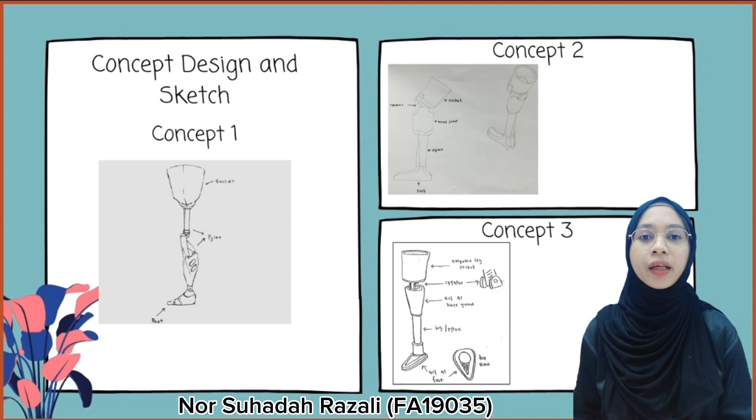We have 3 concept designs for our prosthetic leg. Concept 1 has 3 parts, concept 2 has 4 parts, and concept 3 has 3 parts. For concept selection, concept 3 was selected for our project because this design is user-friendly and comfortable.

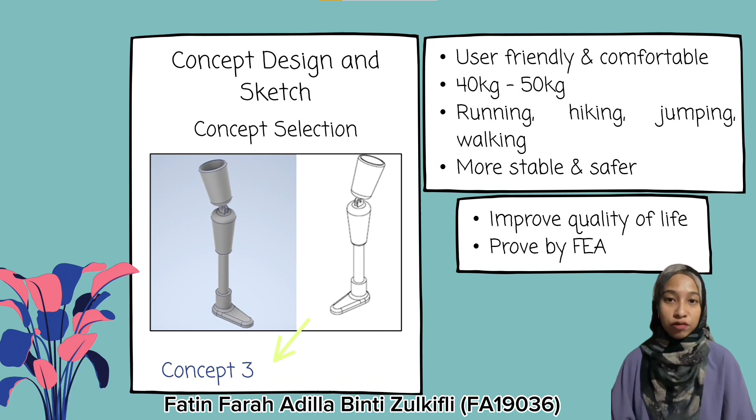It is suitable for weight between 40 to 50 kg and can be used for running, hiking, jumping, and walking. It is also more stable and safer, and may improve quality of life. All these statements can be proved by doing FEA, which will be presented in the next slide.

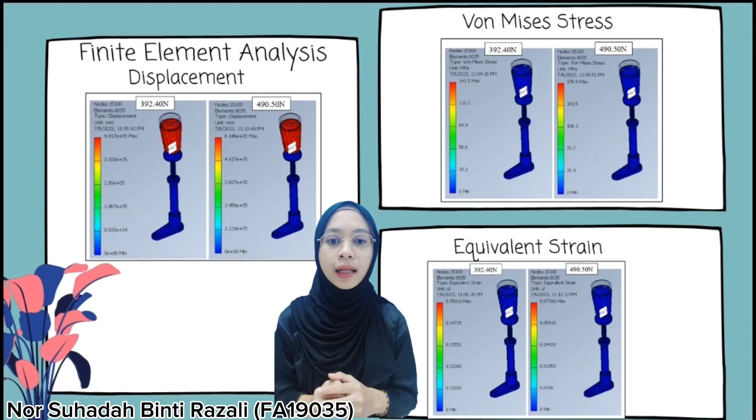This is the finite element analysis. We did FEA before printing this part. The FEA was done after doing a topology optimization to get the final design. There are 3 analyses: displacement, von Mises stress, and equivalent strain. The results show that this prototype will support a weight of 40 kg to 50 kg.

For prototype design consideration, we considered 4 items: the first is the scale, the second is the thickness of each layer, the third is the orientation of the product, and the last is material selection.

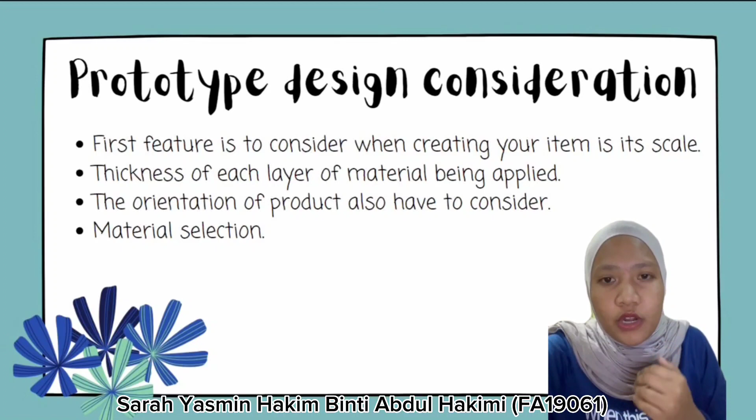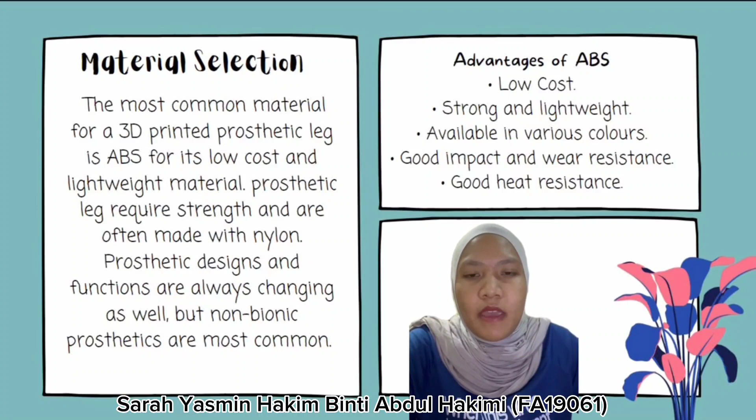For material selection, we chose ABS because it is commonly used for 3D printing prosthetic legs. It also has several advantages: first, ABS is low cost; second, strong and lightweight; third, available in various colors; it also has good impact and wear resistance; and the last advantage is good heat resistance.

The bill of materials for our product has 5 parts: part A, part B, part C, part D, and the pin for the prosthetic leg. Every part has a quantity of 1 only, and all materials used are ABS.

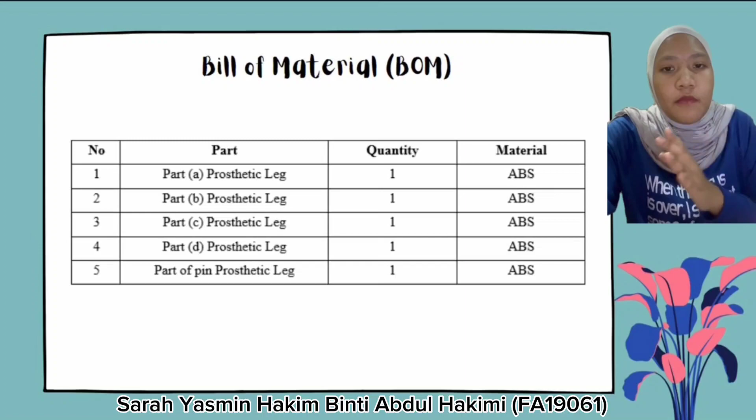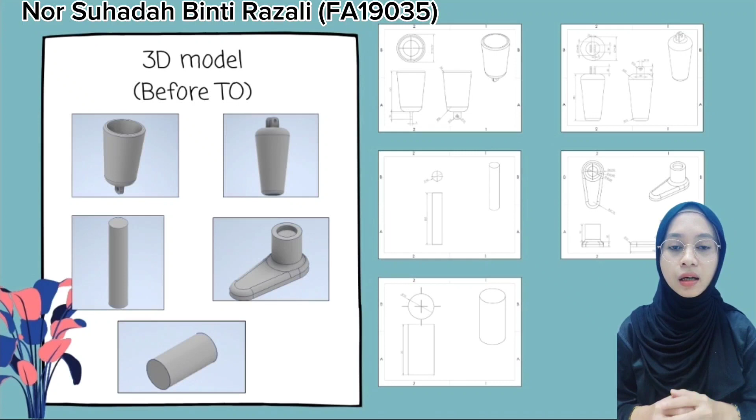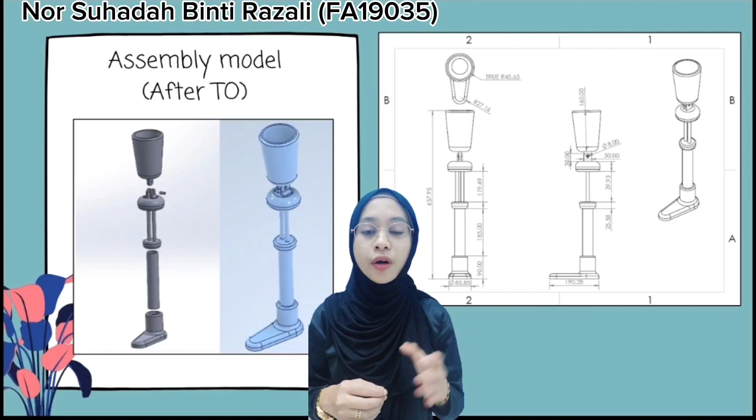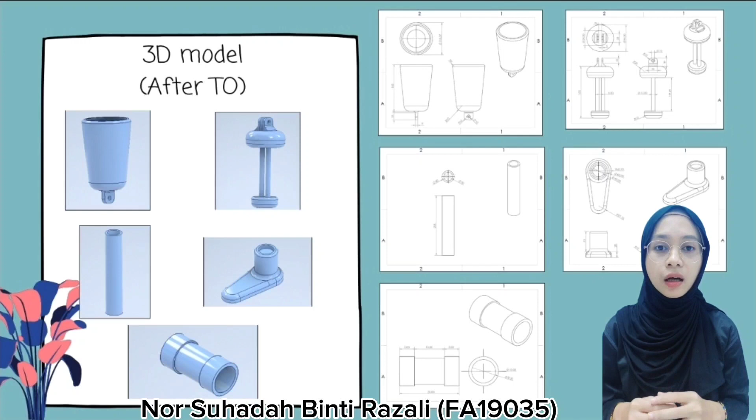This is the assembly model after topology optimization, with our design and dimensions for the product. This is the 3D model after we did topology optimization, with the design and dimensions shown.

For the functional criteria, which is the main parameter of our product, we focused on the strength of the prosthetic leg because the product needs to be long-lasting and have better quality. Based on the FEA results, our product has good strength and can withstand the considered load.

The second parameter is energy efficiency of our product, which we are aiming to minimize the energy use as appropriate. Joint alignment will reduce fatigue and discomfort.

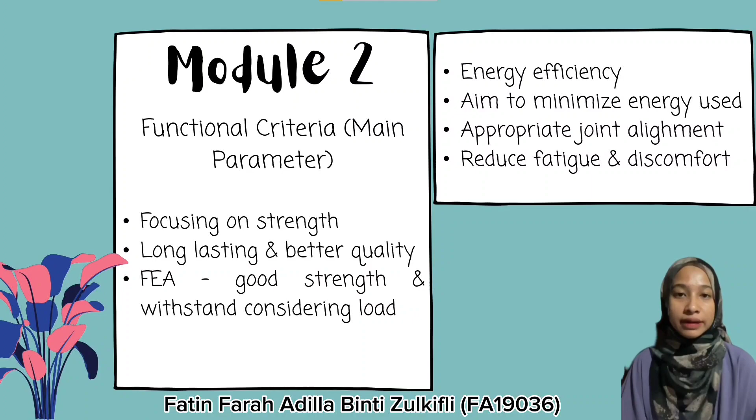For module 2, I have been given the task to do orientation and also support structure. This is the orientation of the 3D model that we designed using CATIA, and after that we convert it into STL format and transfer it into Ultimaker Cura.

So we want to see how the legs are made before we do the printing process. These are the isometric view, front view, left and right view, and also the top view.

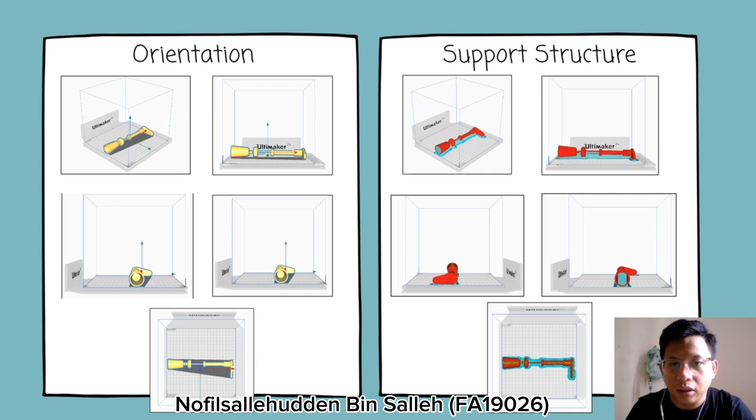For the support structure, after we do a slicing process, we can discover that the support system of the prosthetic leg we want to print has been generated. The turquoise here presents the support that will be printed for the process. The support helps in printing the structure so that it cannot topple easily.

Topology optimization process. For the topology, we did one design because this design has a lot of material. So the original mass part is 0.949 kg.

We do a mass reduction of 40%. Then the final mass is 0.569 kg. For this topology, it suggests doing a cross-section design, but we observe this cross design is not strong. So we adjust this topology.

This is the new design, using topology optimization.

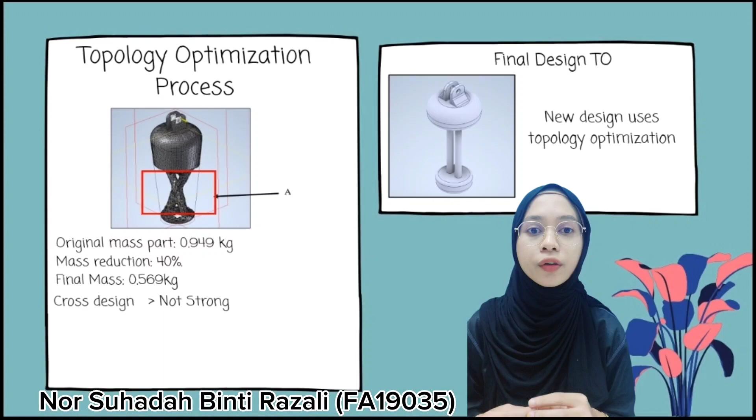For the printing parameter setup, we have 3 parameters. The main parameter, which is the first one, is speed. We use 50 mm per second for high quality print.

The second one is infill. We use 80% infill density because it can make our prototype stronger and more durable.

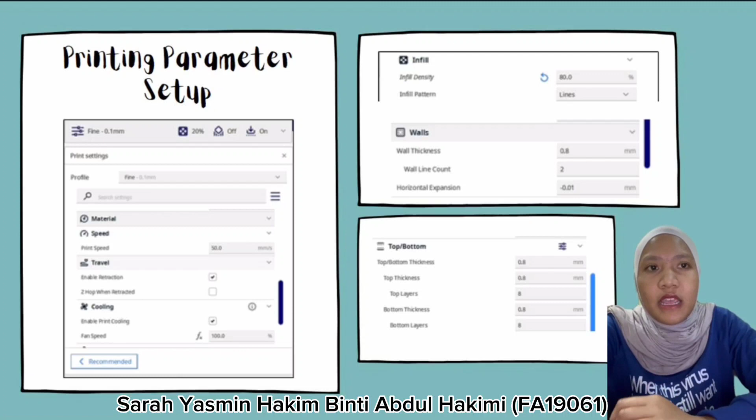The third one is wall thickness. We print with 0.8 mm wall thickness. The reason behind this number is that the part printed with a single wall can form effective part strength and dimensional accuracy, and provide a strong part.

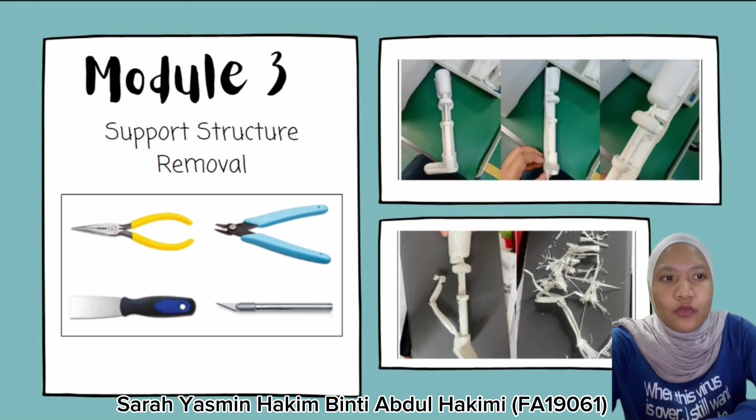For module 3, I've been given the task of painting. For the painting, we decided to use brown color because it can imitate the amputee's leg color, and also we want to help make the visual of the prosthetic leg more vibrant.

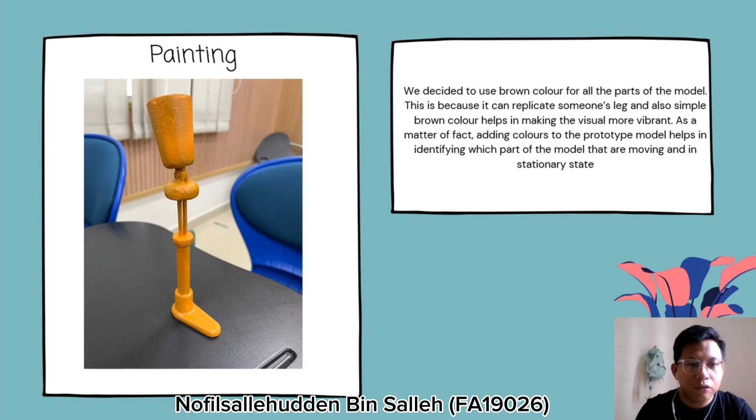As a matter of fact, by adding colors we can identify which part of the model is moving, whether it's moving or in a stationary state. Also for the painting, we use air spray for the prosthetic leg model.

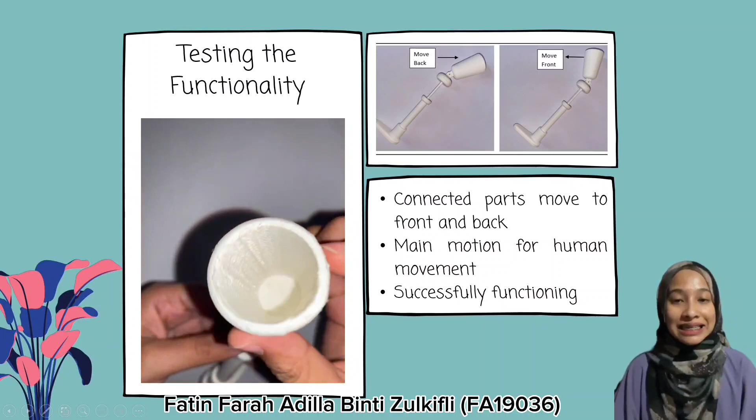Next, as you can see in the video, this is the testing functionality of our product. The connected part moves front and back as it is the main motion for human movement, and we can see that our product is successfully functioning.

For further improvement of our product quality, my suggestion is to exchange the design of the pylon part by redesigning it into one cylinder shape with a larger diameter and hollow inside.

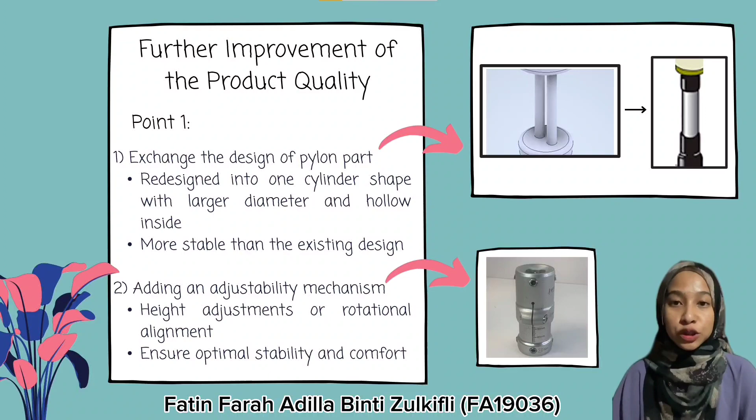Next, adding an adjustable mechanism at the pylon part, such as height adjustment or rotational alignment, will ensure optimal stability and comfort for the user.

Further improvement of the product quality: first, change the design for the foot movable part, which is to add a pin instead of a plug-in method to ease the movement of the prosthetic leg.

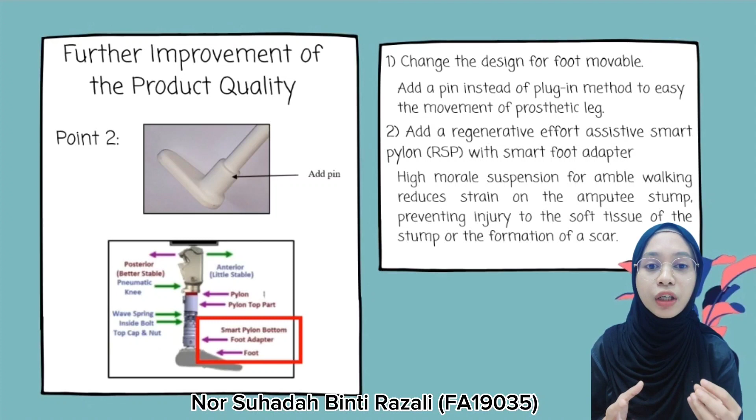Second, add a regenerative effort assistive smart pylon (RSP) with a smart foot adapter. With height variable suspension for amble walking, this can reduce the strain on the stump, preventing injury to the soft tissue of the stump or the formation of a scar.

So that's all from us.